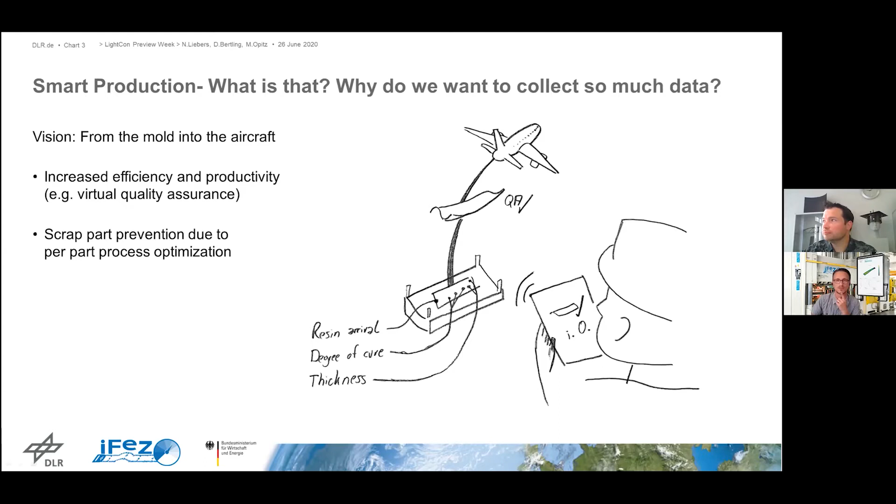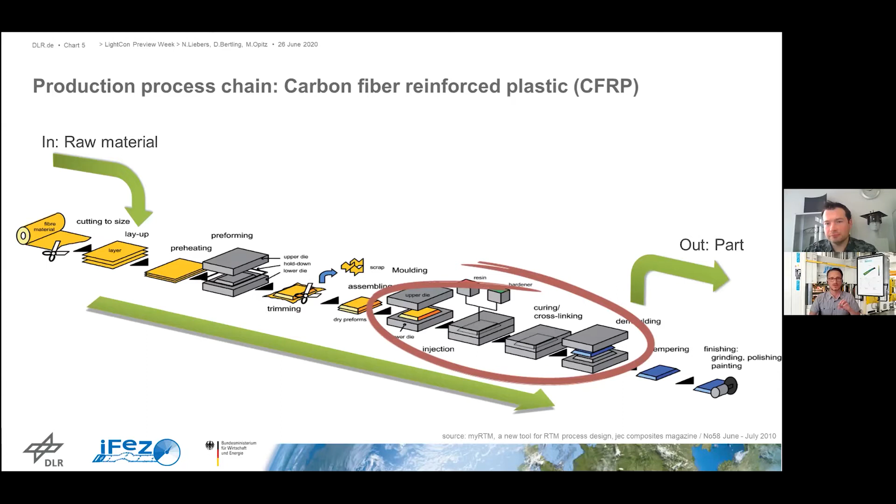This very important step of infusion and consolidation takes place in a closed mold inside of a press, which means there is no feedback at all. At best, parameters of the machinery or process boundary conditions are known, for instance the mold temperature, the injection pressure, or the clamping force.

So the production is mainly based on experience, whereas if we know what's going on inside, we can act accordingly. So what we had at the beginning of our work, and almost everybody working in this field, was a black box, as you can see on the screen. To explain this in more detail, I've brought you an example.

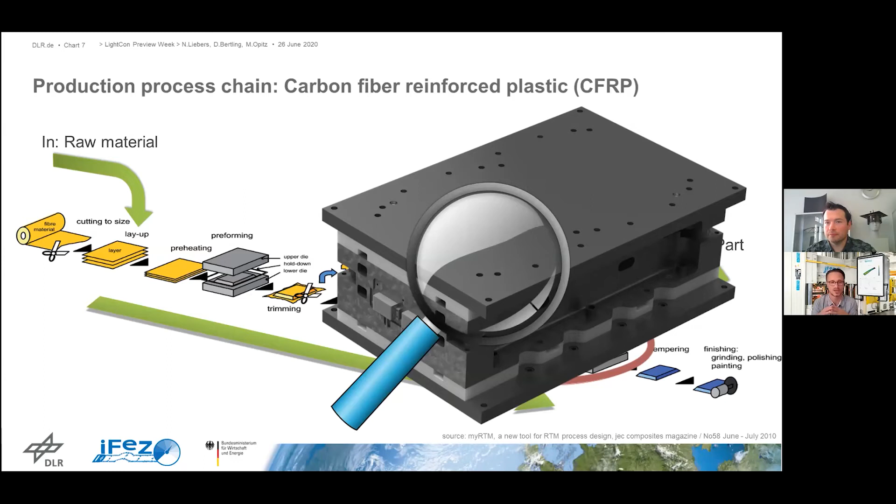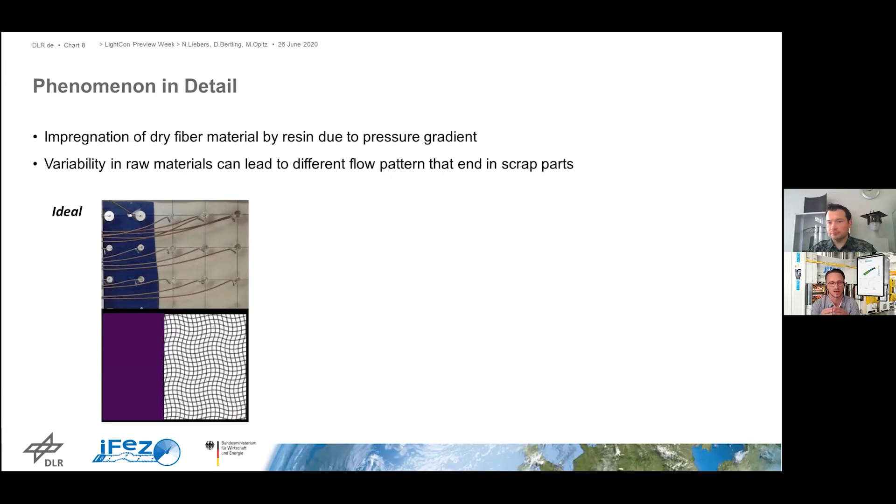As I explained before, we have at least two materials at the beginning, and here you can see the impregnation process of the fiber with the resin through a glass plate. In this ideal case, the component is filled evenly and completely from the left to the right, and you can see a straight flow front which is formed, and the component is impregnated perfectly with the resin. In reality, the materials have fluctuation, which can affect the process and the component quality.

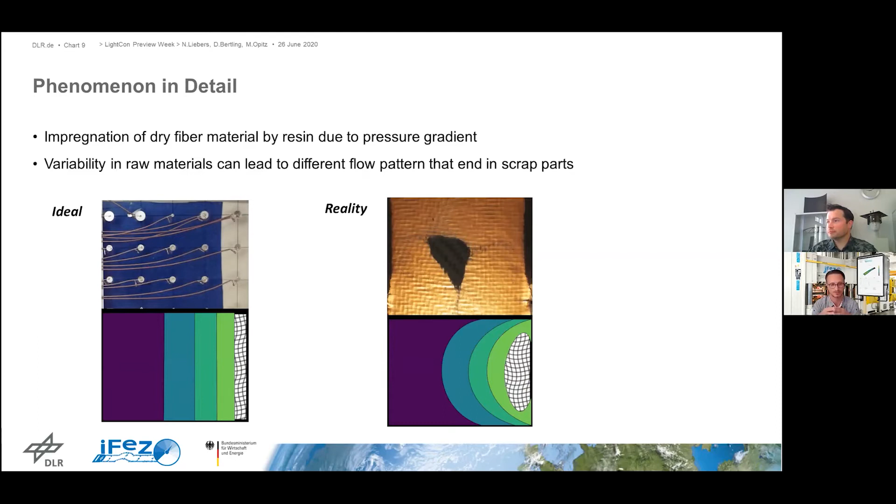So here on the right, you can see this reality. In contrast to the ideal status, the flow fronts tend to form because there is a small gap around the component, and on this edge around the component, the resin flows much faster than between the fibers. This is also called race tracking.

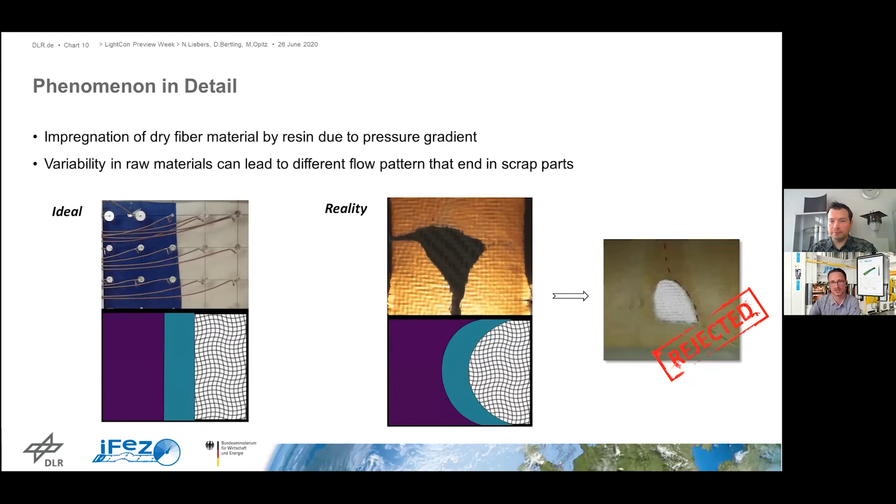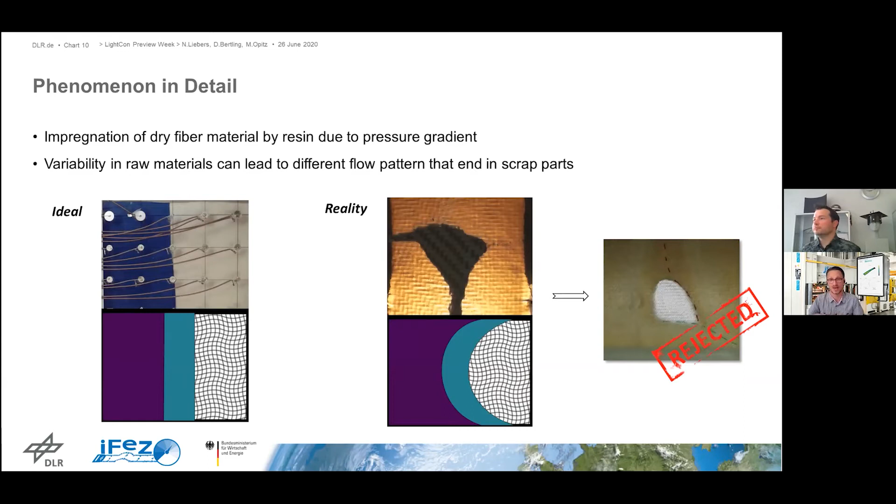Also, defects in the fiber material itself represent such channels. The result of such a complex flow front can be the inclusion of dry areas, and under circumstances these dry areas can remain in the component and finally lead to scrap. A proper process management can prevent these inclusions or lead to their dissolution. In the end, reducing scrap is possible.

In our case, the black box is an existing mold of the previous project Colibri, and represents a closed mold scenario for the resin transfer molding process of a Z-frame. Hundreds of these Z-frames - I have one here - are part of the fuselage to reinforce it in a circumferential direction.

So the goal within iFeZ was to provide technologies for improved manufacturing processes, which means, on one hand, determining the current status of the part and process by integration of sensor systems into the mold, and on the other hand, the central acquisition of these sensor systems and machines, as well as the preparation, processing, and visualization of this expert data in real time.

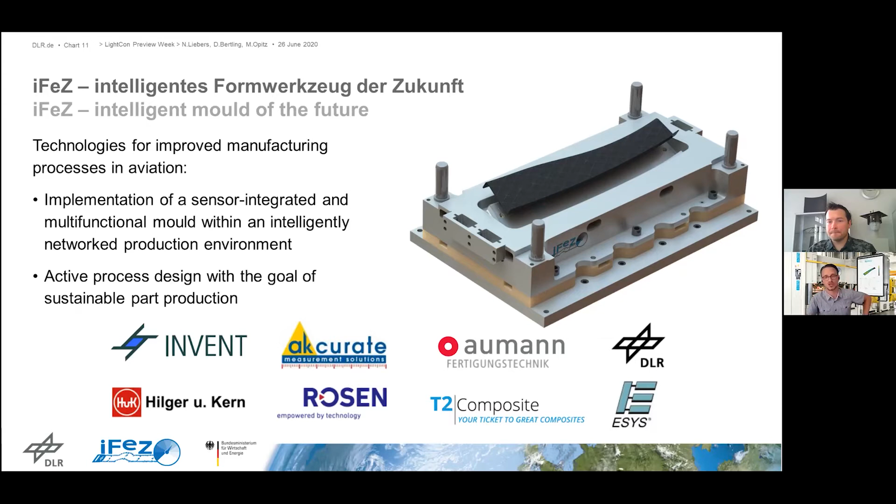Well, to connect the real world with the virtual one, you need a sensor. So our first question was, which type of sensor system or sensor is relevant and should be integrated? For this purpose, we conducted a survey in industrial companies and science, and asked about critical component properties in the field of aviation and carbon fiber reinforced plastics.

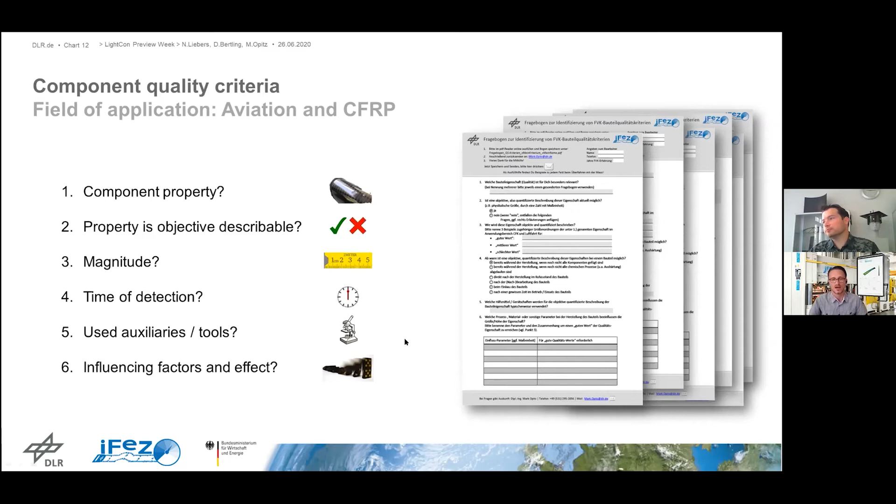The feedback was a list of more than 50 different features, and after grouping we had a list of 6 relevant parameters you can see here. Together with the project partners, possible sensor systems were selected or developed in our project to identify these parameters.

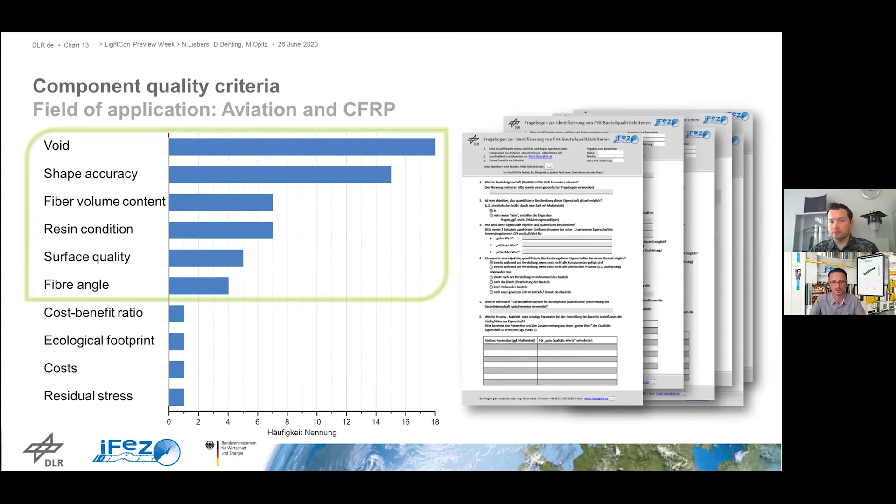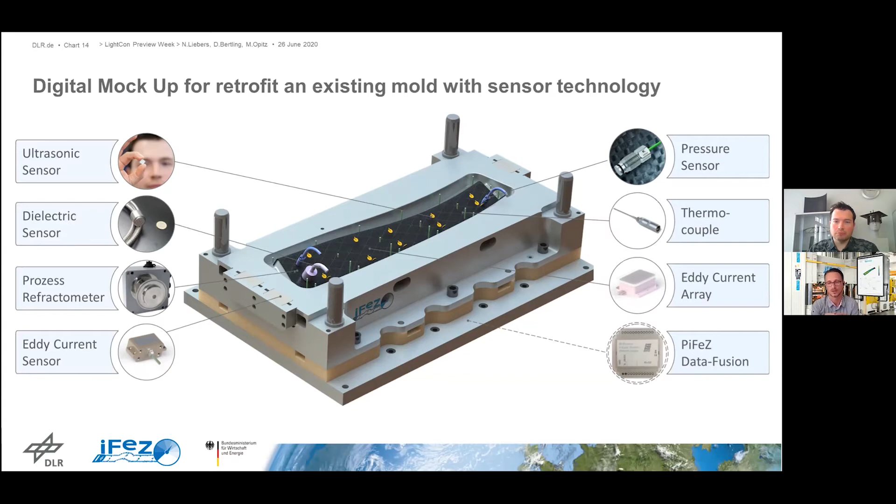So before the final implementation, the selected sensor systems and sensor technology were integrated into the existing mold using a digital mockup. With this ability to visualize in 3D, the optimal sensor position and cable routing was found, and also interaction between every sensor was excluded. Also, the basic function of the tool - the existing heating and sealing - was ensured. In addition, the basis for the subsequent milling work on the forming tool was laid.

As a result, together with the project partners, we were able to refit the existing tool, the existing mold, with the sensor technology. A total of 7 different sensor systems were implemented based on the evaluated quality criteria.

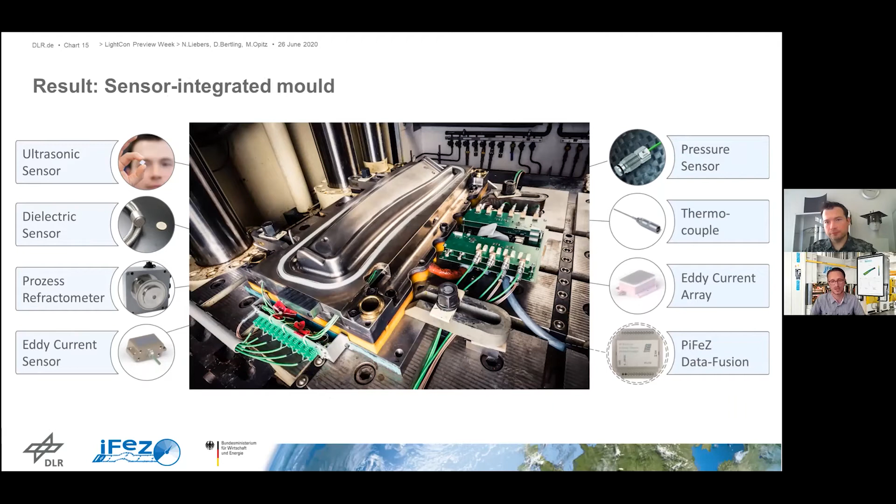The total number of sensors in the tool was around 80. This is a high number and should not discourage you at this point. We simply wanted to test whether sensor systems influence each other, and what resolution and bandwidth we actually needed.

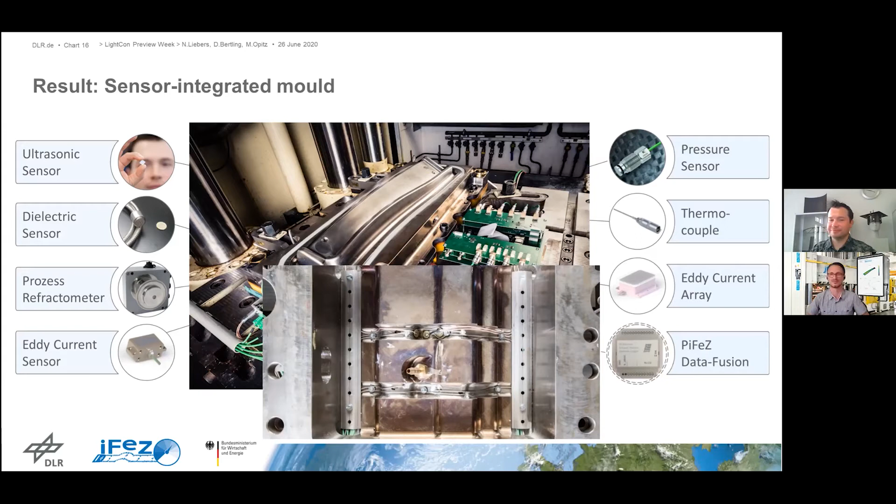So, start small, think big. With this statement, I would like to return to my colleague, Nico Liebers, and give him back the mouse. Yeah, thank you, Mark.

As Mark explained, we had several project partners that each developed and integrated seven different sensor types into the existing mold. Each of the previously identified quality criteria represents a separate scientific field or area of expertise for each of these sensor systems. For this reason, it was essential to stick to a modular design, and nevertheless, no isolated solutions should have been created.

Besides solving unsolved problems, a main goal of our work, especially as a research facility, is the transfer of knowledge. The barriers between knowledge providers in their field of expertise and the knowledge takers should be reduced to a minimum. If possible, the knowledge takers should be able to operate the sensor system without in-depth expert knowledge. Therefore, we need the digital infrastructure, or in other words, Internet of Things and sensor technology, as a tool to build bridges between the parties involved.

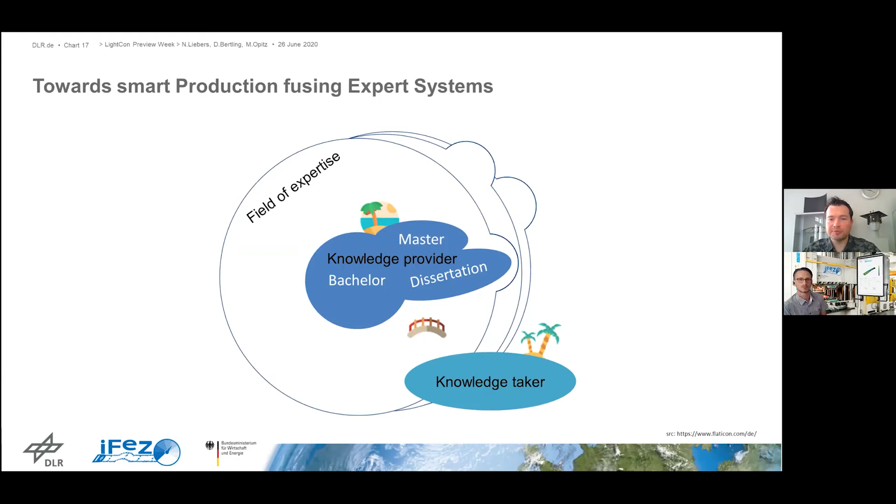At the beginning of the project, most of our sensor systems had been at a stage we call pseudo-digitalization. Our data could have been passed paperless, but a USB stick or an email would still have been involved, and it would still have been required to do things like importing the data, reformatting, and synchronizing the data.

So based on the existing infrastructure we have here, the cornerstones for real digitalization were established. The systems and the machines must be able to communicate with each other, and we wanted to integrate people into this flow of information using suitable and available instruments. However, digitalization should not give rise to a monopoly of interpretation, so neither the machines nor the humans should have an exclusive right on the data.

Nevertheless, for us, true digitization can be described by the flow of data. Not the human being is the end user, but another computer program. So the discussions of how to manage this data flow quickly led to discussions about the necessary architecture.

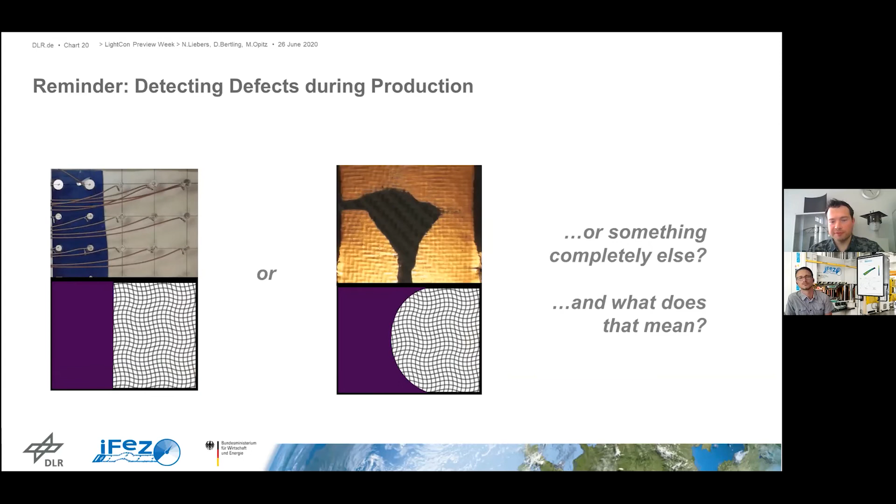So in order to avoid such defects, we use sensors for quality monitoring. One example is an ultrasonic based process monitoring, which is in development at our institute, and is one of the former isolated solutions for experts.

But in all of these steps, expert knowledge is required. For example, already for the correct measurement of the raw signals, the same applies to all the next steps getting to the flow front information. So in the course of digitalization, these inputs should be automated as far as possible, or stored depending on the mold, or users should be helped with wizards in a dialogue in a user interface to get to the right settings.

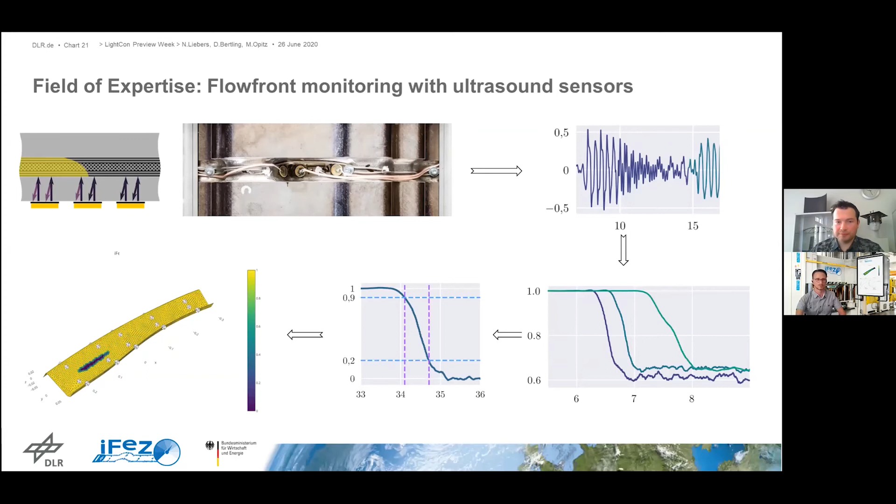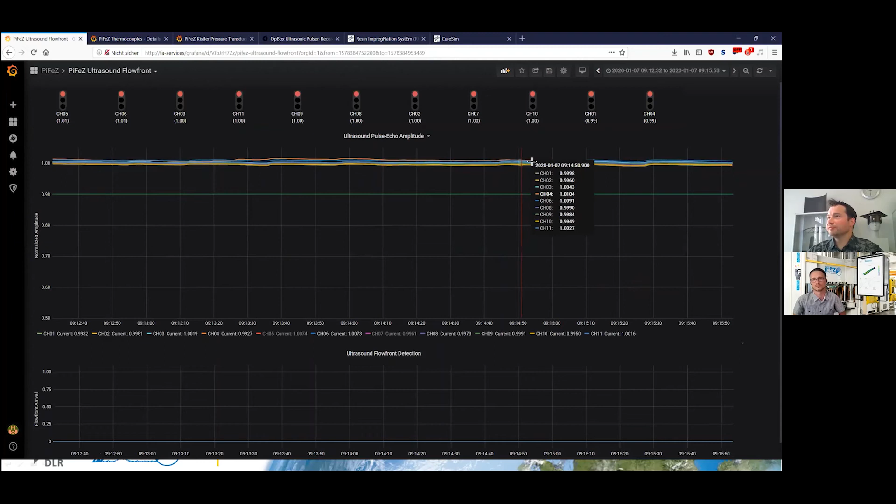If I go back now in time of our test, before the flow front arrived, we have still the full ultrasound amplitude, and all the traffic lights are on red. Then when I go forward again in time, you see the first flow front detection, the flow front is detected, and then I'll go back as I showed you before. After the injection is completed, we see that all sensors show the flow front has arrived.

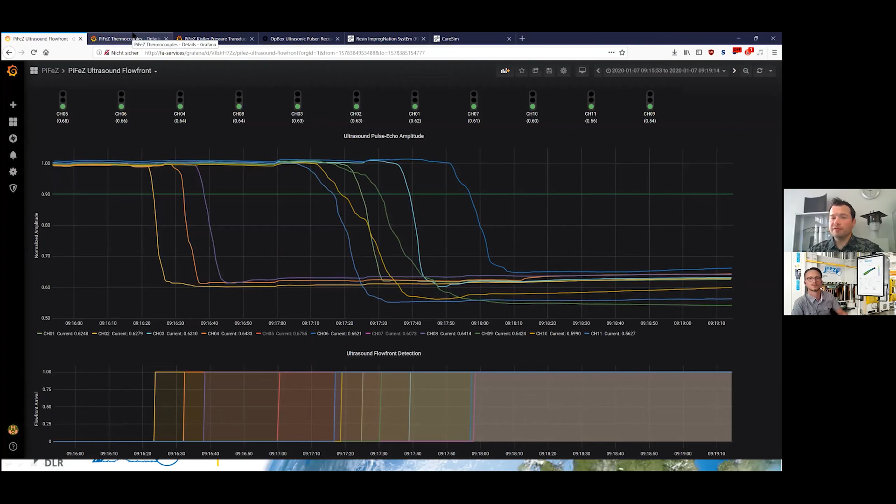And we have dashboards like these for all of the sensor systems we integrated. For example, for the temperature we measured of the mold.

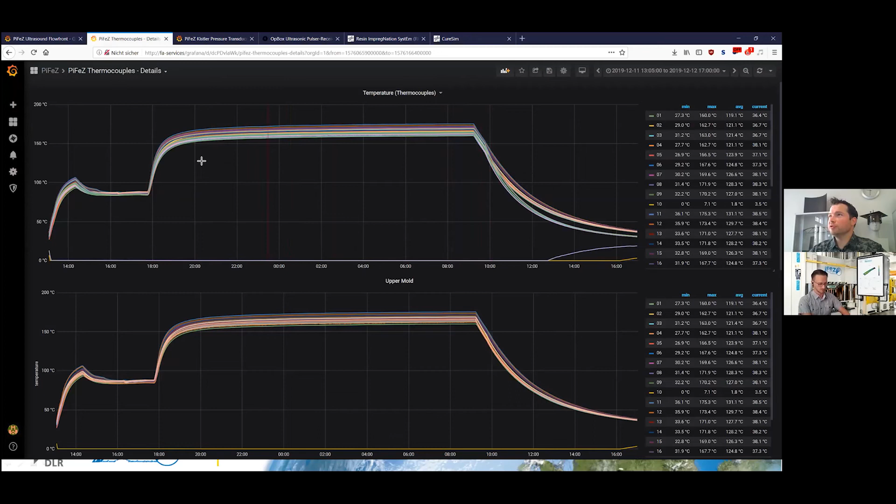Here you have, for example, the heating before the injection, and then you have the injection step at a lower temperature. After the injection, so after the ultrasound sensors would show the injection is complete, then we can heat up to the cure temperature, and then when we detect that the cure is completed, we can finally cool down the mold and demold our component. Another example I want to give you is the pressure sensor we had integrated in the mold, where you can measure the vacuum pressure and then the resin pressure during injection.

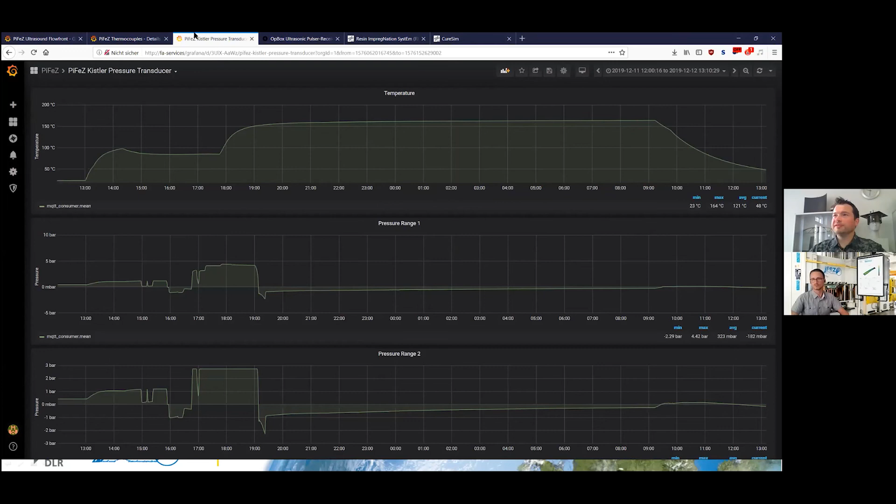And these were the dashboard examples for humans, in quotes. Now I show you the so-called API to get, for example, the raw data of the ultrasonic measurements.

So in the API module we use with Python, it creates directly a documentation page. If you go to the address of the service, you have listed all the available

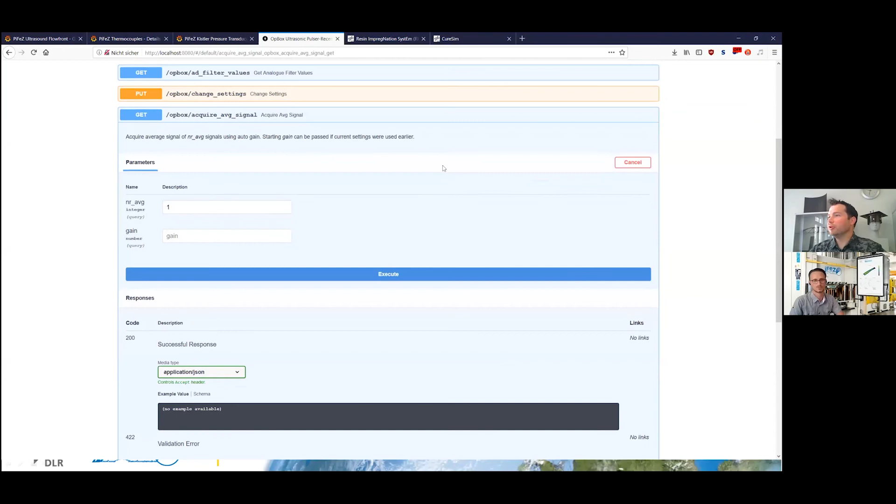methods this API has implemented. And for example, if you would want to directly use the raw signals and analyze them yourselves, or connect the service to the raw signals, you can even try this out in this documentation page. So if I press on execute, I get the response of the raw signal, which is a very long list of numbers, and a machine would call this method like shown here.

In this way, the former isolated solution of the ultrasonic sensors, which originates from a PhD thesis and was previously reserved only for experts, can now be made available and usable by others. An important part of this is that the APIs should always provide documentation, just like I showed you before.

And so former 1D information of the sensors is hence transformed into a three-dimensional flow diagram reconstructed from this measurement data. And the current state can be evaluated as well as the prediction of the future, where the flowfront would go after this. And we can evaluate these results if any defects will occur.

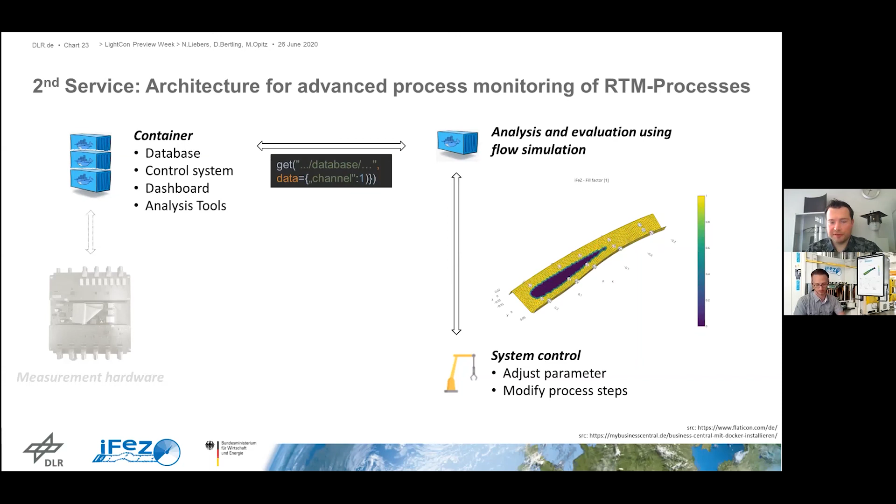So to sum up and give you a quick overview of the benefits. We started at the beginning of the project with an experience-based conventional process, and we had this black box, and we had to use our long year experience to design the process.

We now reached, with all the sensor data and the coupled simulations, a knowledge-based process, founded on the fusion of sensor data, analysis methods and simulations. With that, we arrive at transparent and efficient processes, and by reducing the process times,

we lower the quality fluctuations and reduce the number of scrap parts. We preserve the knowledge and make it also usable for others, for non-experts. And we reduce the non-destructive inspection by shifting the quality assurance into production.

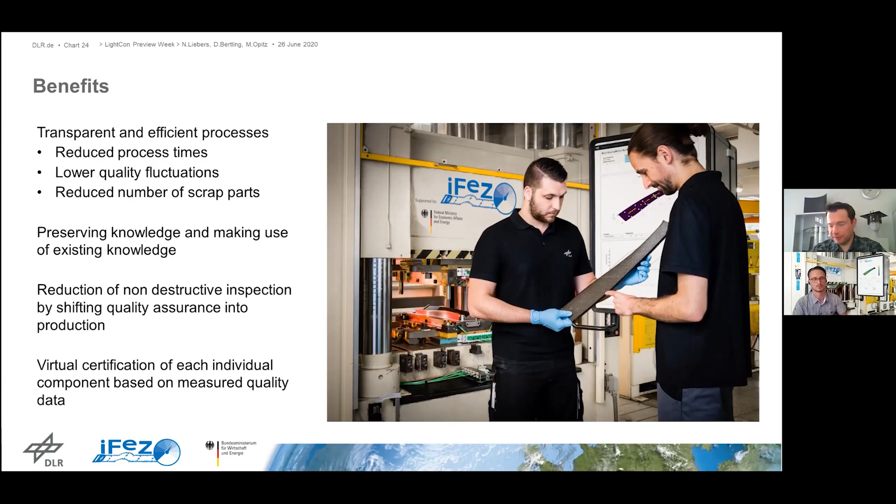Another point is the virtual certification of each individual component based on measured quality data. And to give you a little outlook at what is now possible with our results: with the developed solutions of the digitized injection and cure process of our project iFeZ, we can transfer them now to, for example, the 3 large research platforms we have at our site in Stade.

passed. And the second example is the research platform BALU, which is a large research autoclave with a big number of integrated sensor systems, just like we showed you. The sensor data is then coupled also with a cure simulation, resulting in the virtual autoclave. And with the help of this virtual autoclave, the cure process is constantly evaluated and corrected.